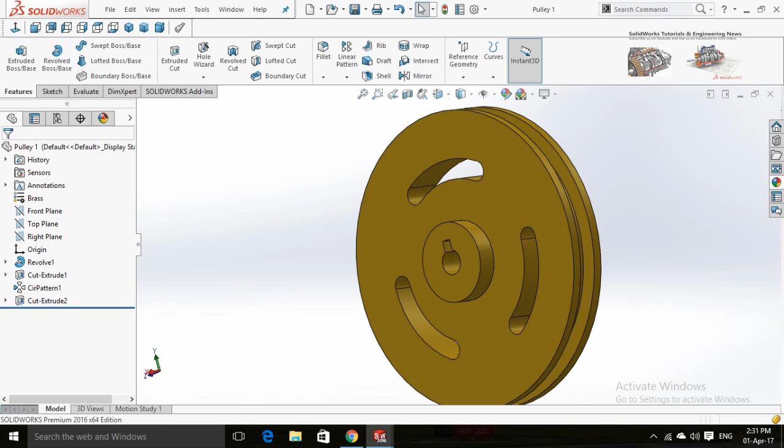Let's start by pressing Ctrl plus N and selecting Part, then press OK, or you can double click on Part. After a while a new window will be opened. From here click on Front Plane and then select Sketch.

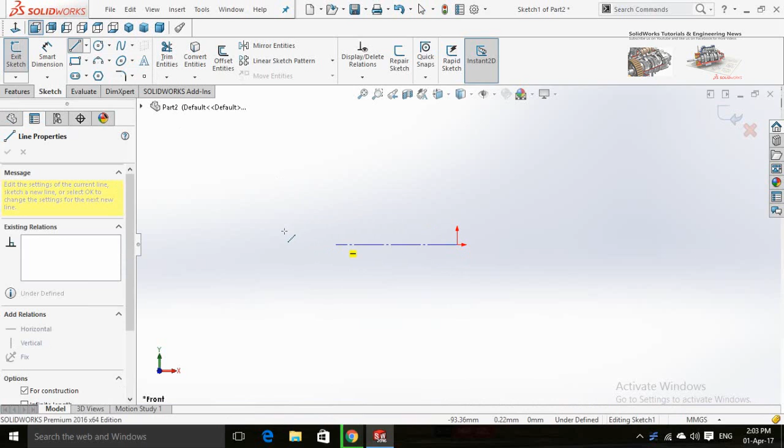Now draw a center line. Press and hold right click and drag your mouse to see some shortcut keys. From here select a line and draw it as I am doing.

Press and hold Ctrl key and select both of these lines, then release it and select Equal. Repeat the same process for both of these lines. Now again press and hold Ctrl key and select both of these points and make them horizontal.

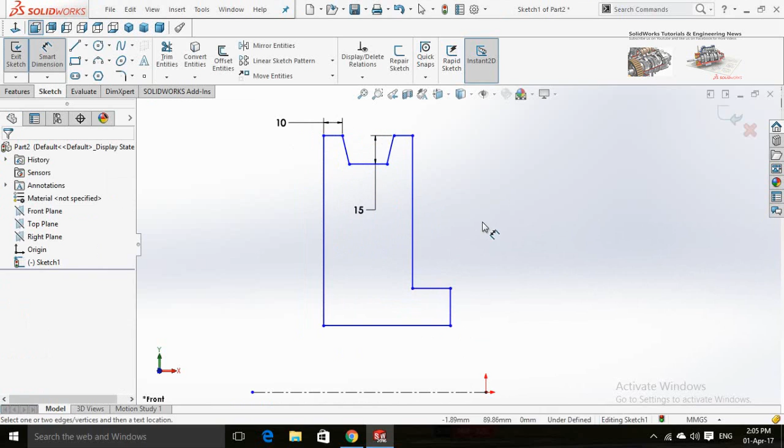Make this line vertical.

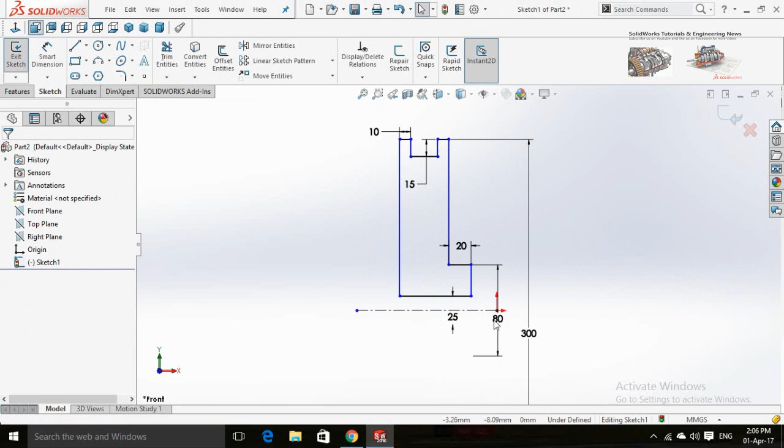Now press and hold Ctrl key and select this point and then the origin, and make them vertical.

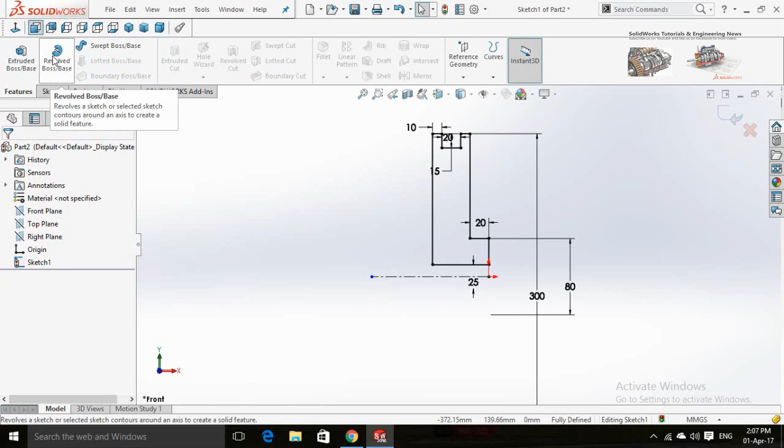The color of all lines in the sketch is black, which means that the sketch is fully defined. Now click on Revolved Boss Base command from Features and press OK.

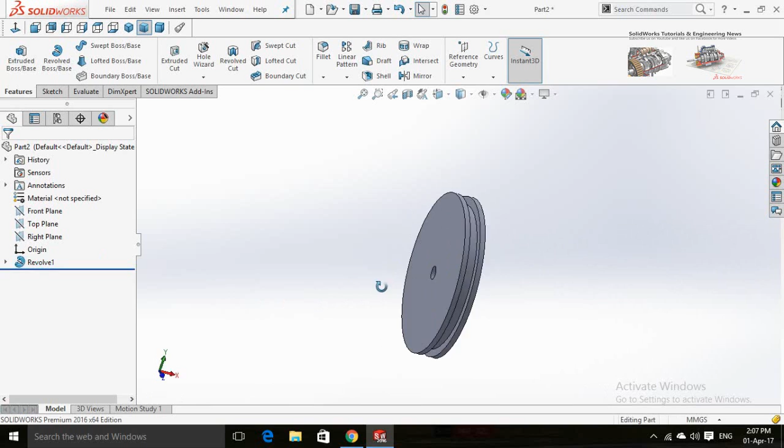Now change the shade. Click on this face and make a sketch, normal to it, by pressing Ctrl plus 8.

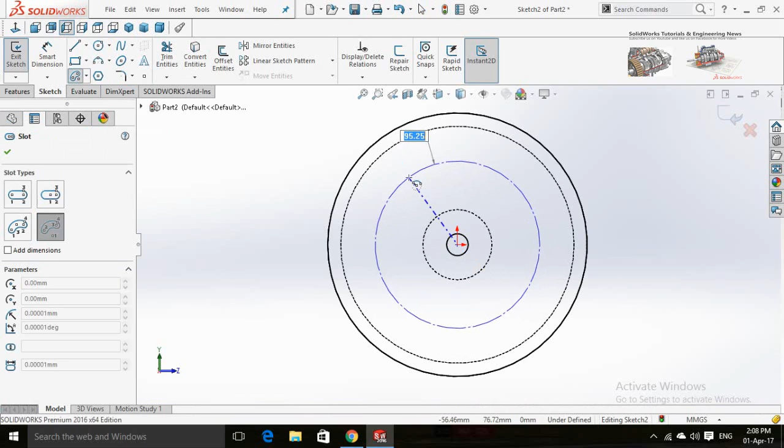Now select Center Point Arc Slot from here and draw it from the origin. Add its dimension. Now draw a center line from the origin to the center of the arc and make it vertical.

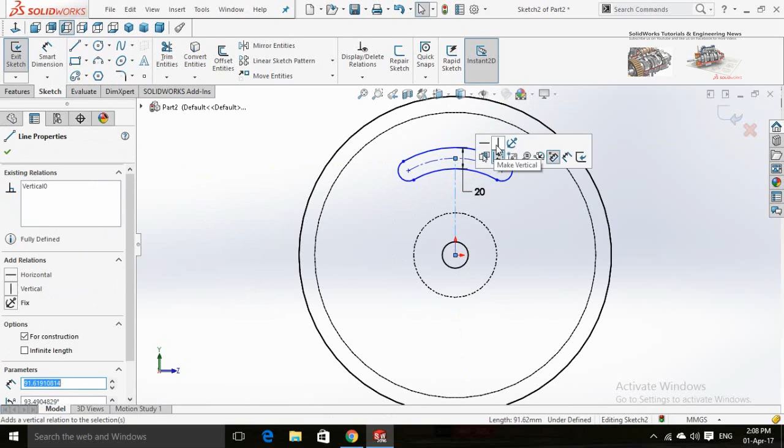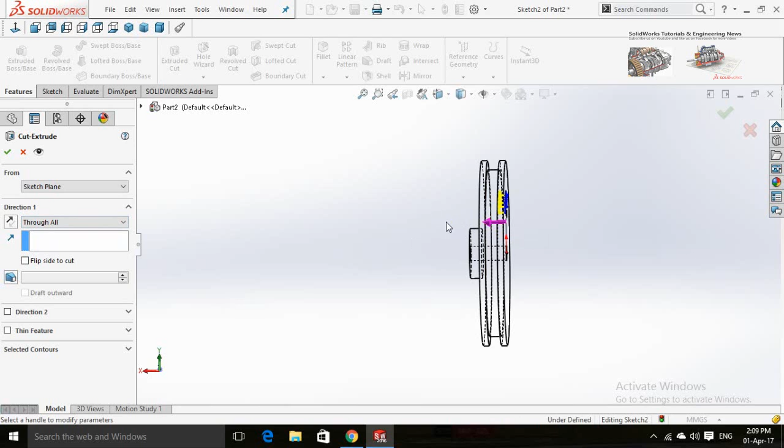Now select Extruded Cut command from Features. Click on this arrow and drag it throughout the pulley, then press OK.

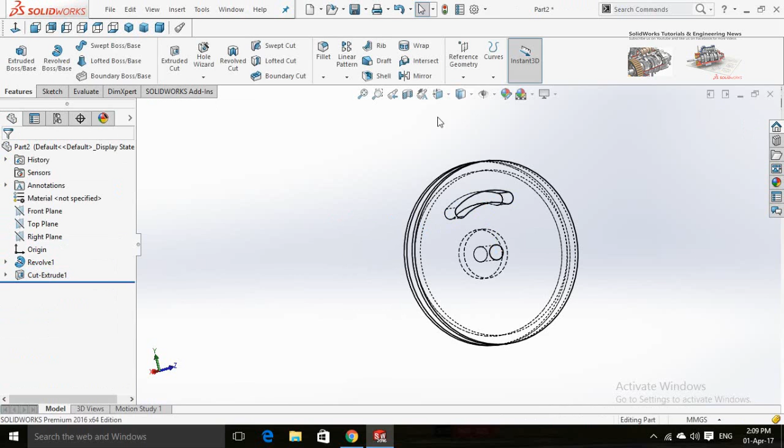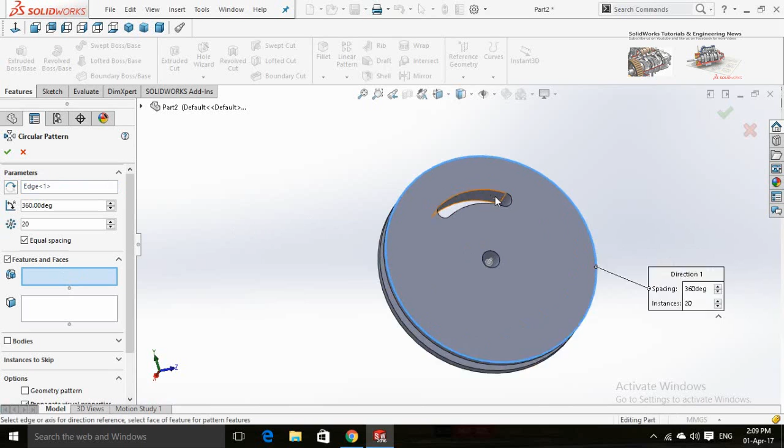Now click on the arrow below the Linear Pattern button and select Circular Pattern. From here select this box and click on this circle for the axis of revolution. Then click on this box and select the extruded cut. In this box write the quantity of the circular pattern, which is 3. Now press OK.

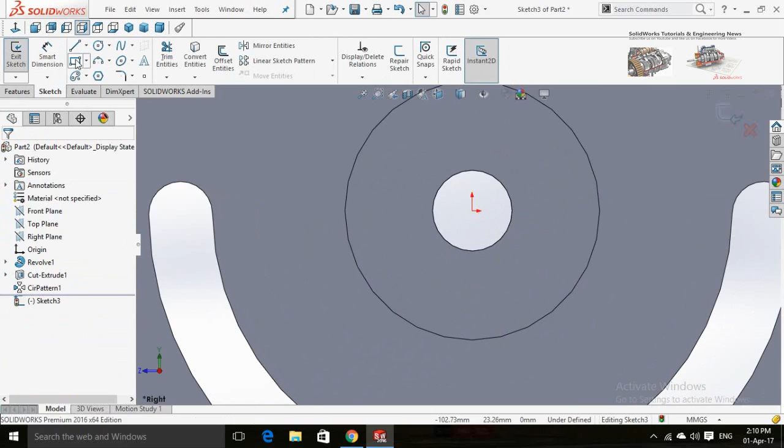Now click on this face and make a sketch to make a collet lock. First of all, draw a rectangle and then a point, and now a center line from the origin to the center of the rectangle. Make it vertical and add dimensions.

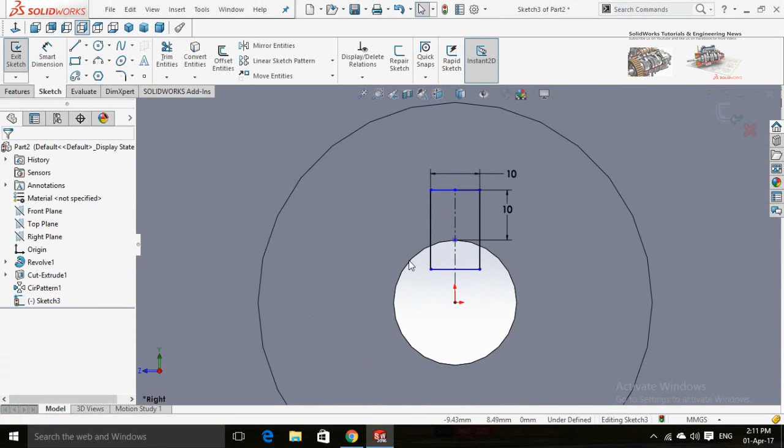Once again click on Extruded Cut command and extrude it. The pulley is almost ready.

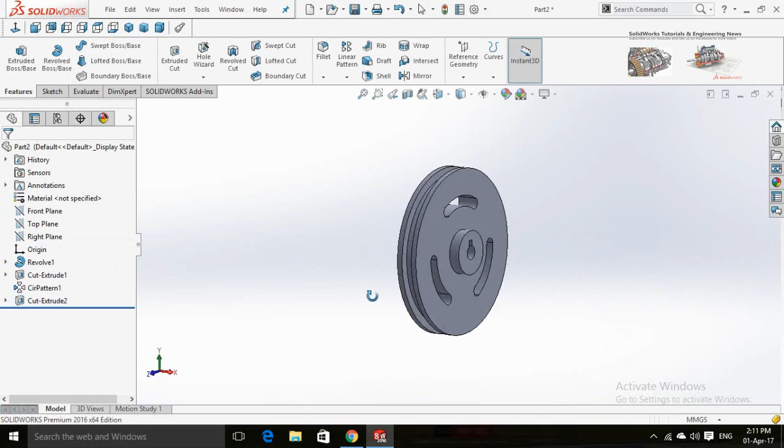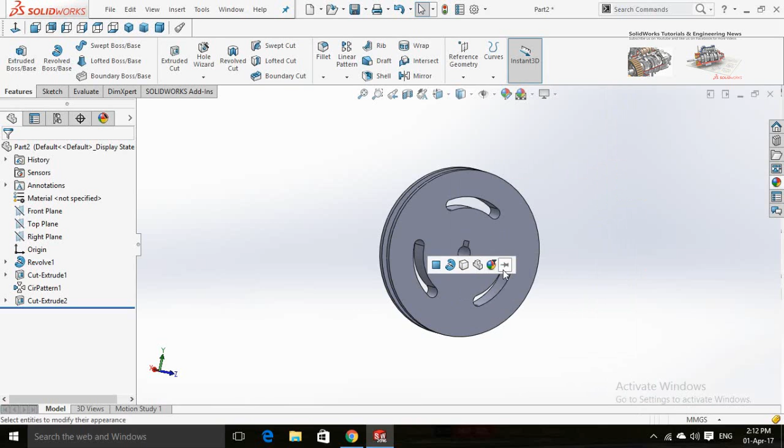To change its color or appearance, click on the Appearance button here and then select the appearance that you want. Double click on any appearance to apply it.

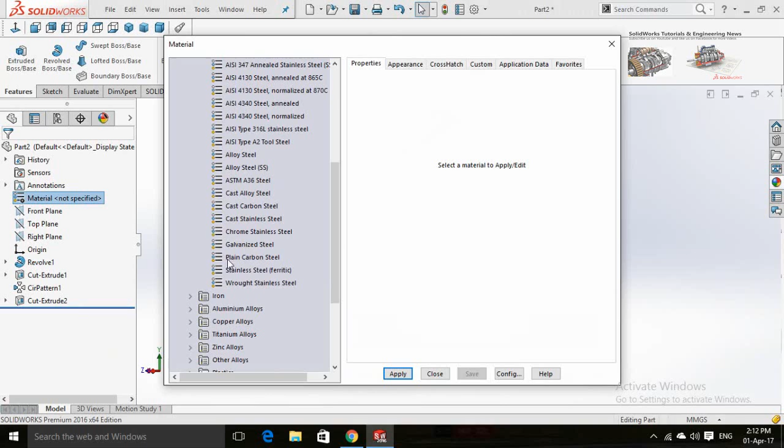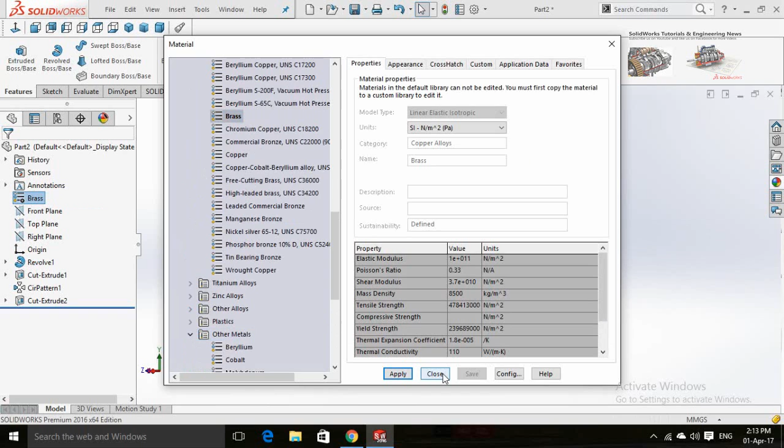If you want to know the mass properties of this pulley, right click on Materials and select Edit Material. From this list select any material and click Apply, then close this window. Now in the Evaluate tab, click on Mass Properties and see the mass here.